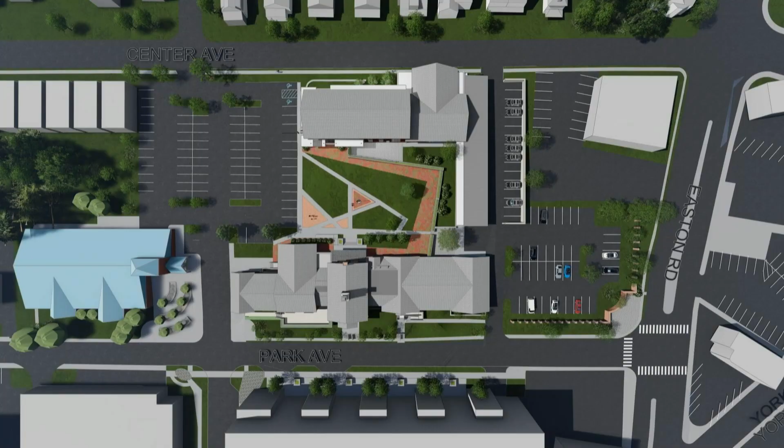All right. Good evening, everyone. Good to see you all again. Again, Rick Stamper with KCBA Architects. I believe you're all familiar with this plan. This is just an aerial view. We have the existing township building here, the library to the left, and then what will be the new police station here. We have an outdoor courtyard area, secure police parking area, the existing lot on the corner, and then the existing library lot, which had this row added for parking.

And I believe, Jim, that we maintain the current amount of parking. Is that correct? There's two less spaces on the property, but from a parking standpoint, in discussions with staff, we believe it's adequate. Okay, and since you saw this plan last, we did extend this sidewalk through to the rear so that somebody could come up through here if you wish. In light of that, we did add a little wall and a gate here to keep this area more secure.

And then you'll see down below here, we just boxed out the massing of the new project that'll be built across the street. So you will see that in some of our perspective shots, how it just kind of looms in the background. I'm going to go briefly through the building plans. They're oriented the same way that the buildings are in this plan.

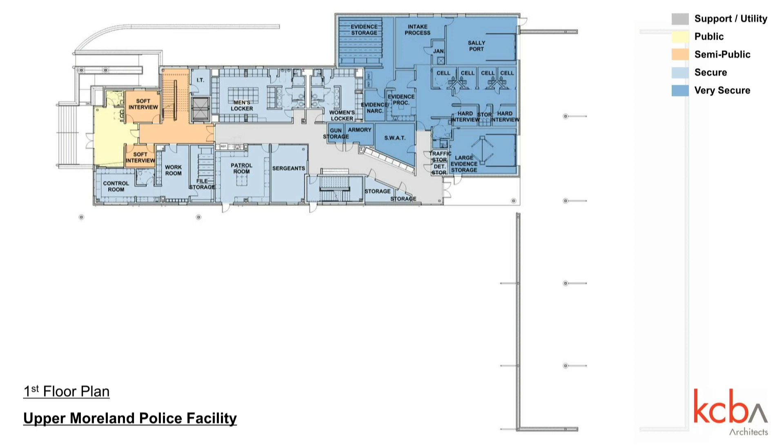And then anything in orange is what we're calling a semi-public space, which is a space where somebody would need to be invited back into or escorted through. This is the second level. We have the executive suite here. The semi-public comes up into this area too because we have the training room.

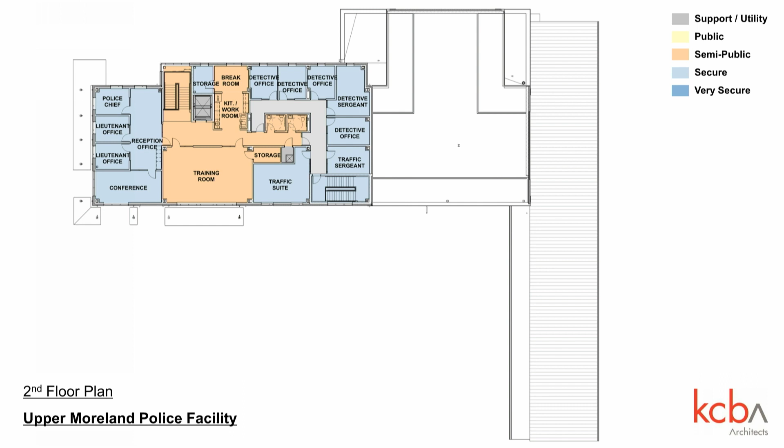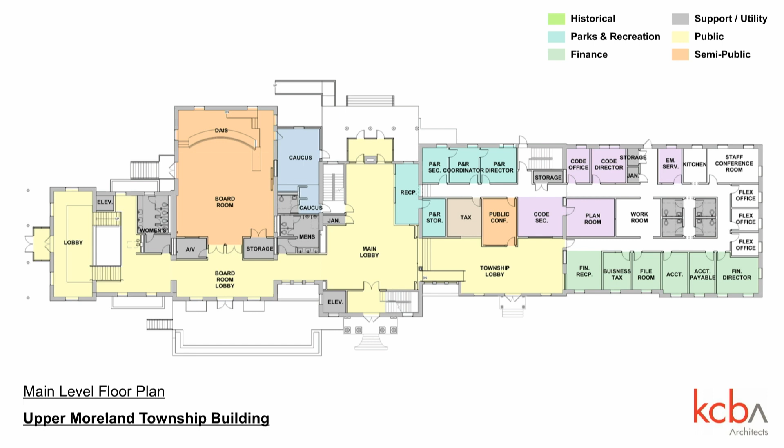Going down to the basement, you come down these stairs to a lower lobby, and we have the historical museum, some flex classroom spaces. And again, the public gets around to this elevator, so everybody on the main level can come down here and access this space, or from this entry, come down the lift and access that space. Beyond this door here, everything to the right is secure township spaces, and anything in gray is just staff areas. We did keep the offices to the nice window wells and windows. And then everything else is storage space for the offices above. And then carving out space for the EOC, along with some bathrooms and a kitchen.

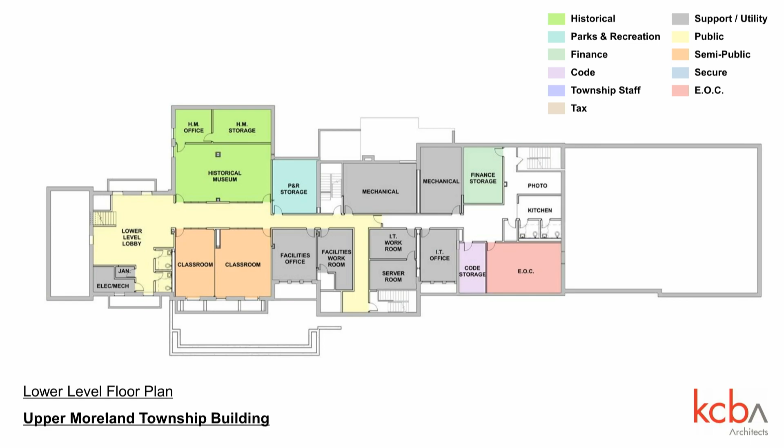What was the EOC? The Emergency Operations Center. Right now, it's in the police. Yep. It's an unfamiliar acronym to lots of people. Good, no, that's good to point out. Except when you have a hurricane.

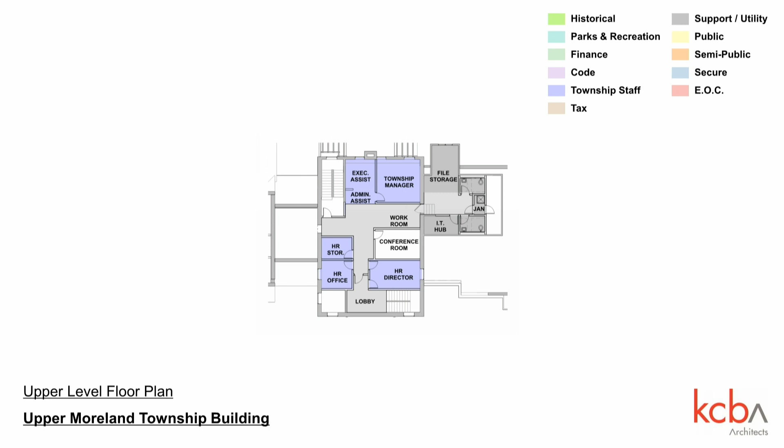Right. And then the upper story, it's basically who you have up there now, right, Matt? So it's the administrative suite for the township and the HR offices, a small conference room, some file storage and their bathrooms. So a bird's eye view from the new apartments across the street. Again, just to give you some orientation, the first perspective we're going to show you will be from Center Ave, from right about this point where you would enter the parking lot. So that's what that looks like there. Again, you can see the context of the houses over here, the township building, and then the new 6-story apartment buildings across the street.

So this is a view more from the neighborhood side of the street looking across. You'll see we have an ADA ramp that snakes up to get to the level of the entry there, and that houses the signage for the police there. And other than that, we'd have a set of steps up that is civic in some sense of the word, in terms of having a civic presence there. And then this is just showing more of the context with the library down here, and then what will be the lower entry, which will become a two-way in and out now.

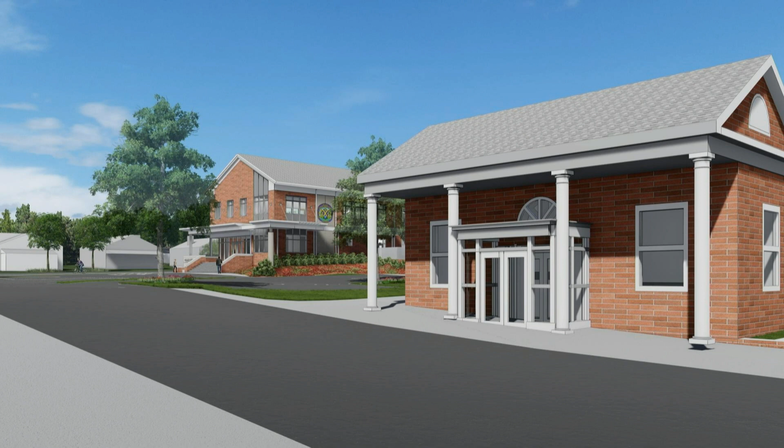The next shot is from that area looking back up into the site. Here you can see this is the existing portion of the township building where we have the vestibule added down here. And as we go up and turn the corner, you can get a sense of what that courtyard may look like.

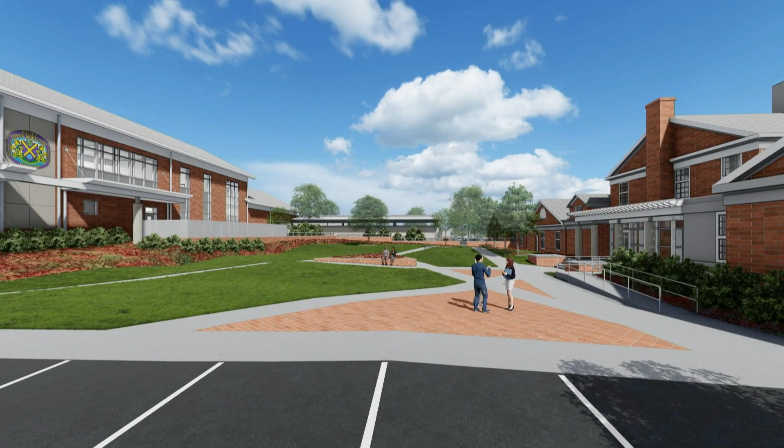And then moving up a bit so we can see the entry into the township building here, the caucus room addition here, and then a ramp up to get up to that level, flanked by some brick planters, frames the stairs. And then after I did this slide, I realized we probably want to do a nice low brick wall here to kind of define the edge of that ramp.

But other than that, we have this landscape wall that comes across the site. It does retain earth up top, which will help us a little bit with the cut and fill balance. And then behind that is the police kind of outdoor patio area. And you'll see beyond the secure parking of the police stretching beyond.

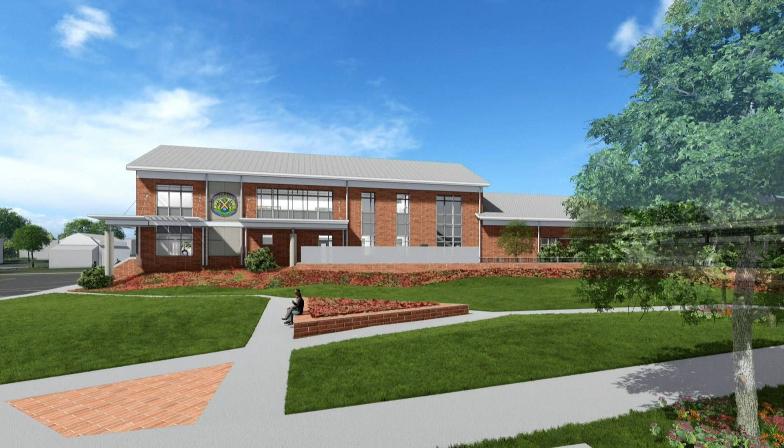And then this would be the view coming out of the entry from the township building, looking across the courtyard to the police building. And then this would be on the Easton Road end of Center Ave, looking down. Again, this would be the Sally Port area of the building, the secure parking for the police, and again, just in context of the neighborhood, what that'll look like.

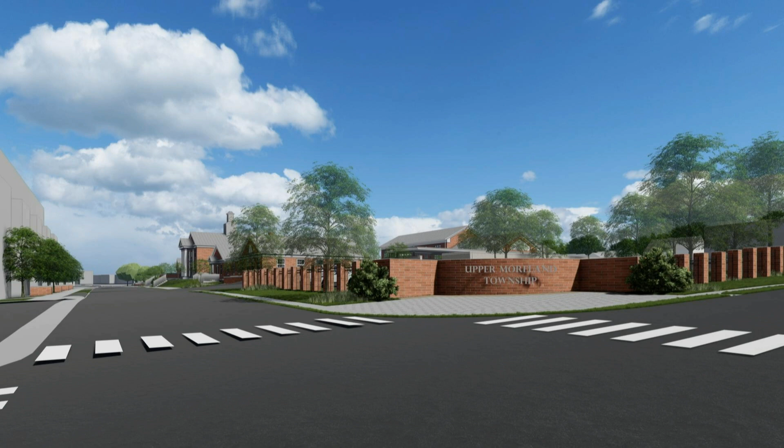And then this is for discussion purposes. This is at the corner of Easton and Park here. Kind of reshaping this corner, using some brick walls and some piers with some ornamental fencing in between to just shield the parking lot and kind of define this corner as kind of the entry into the township municipal complex. Again, you can kind of see the context of the 6-story building on the left side here.

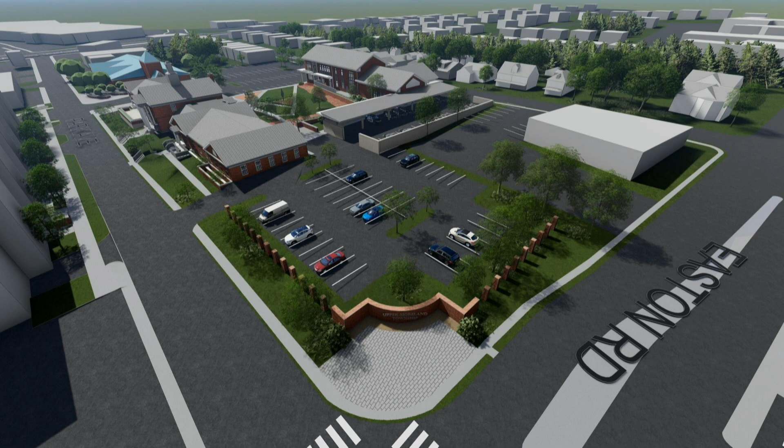But the concept here, looking down, we have the parking lot, so we want to give some thought as to how we treat that corner. Oops. And I don't think, Jim, you don't have that shown on your plan yet, right? It's on the landscape plans, but it's not on. Okay. All right, so I think that wraps it up for me, if there's any questions.

Yeah, a couple questions. Breaking ground to completion, timeframe. Completion of the police or the entire project? The police station, right. Cut a ribbon on the police station from when we break ground. Say we go out to bid in February, break ground late March, early April. I'd give it 12 to 16 months. I'm sure Jim will get into it. There's quite a bit of site work involved because of the detention systems required, which will take some time.

Any other questions for Rick? No, it's been the same since we started, except for this is a nice little entrance. To the public, we've been involved in this process and seen several different presentations like this, and the models have changed back and forth, and this is where we are right now. Yeah, I think, Rick, you made some really good modifications and additions.

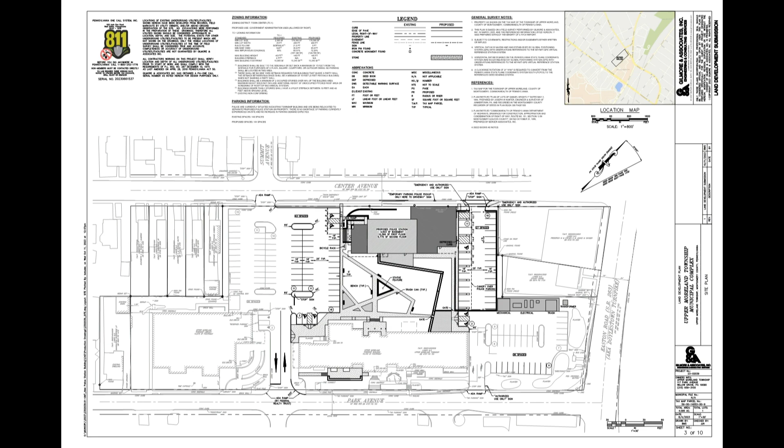We're also going to update the ADA ramps that don't actually exist here today on the sidewalks, so that'll have new ADA ramps along with new ones here, and then new ones for this entrance there. Other than that, from a site plan perspective, I think you could see it pretty well on Rick's plan. So we'll move on to the grading and drainage plan, so you can get a sense of what we're thinking about for stormwater management.

We did a lot of infiltration testing in the back area there. And what we found is that the groundwater and rock shouldn't be an issue, but the soils aren't conducive for infiltration. So what we end up doing is designing underground basins that are called managed release concepts. This is a DEP approved method, and it provides a lot of rate reduction. It provides water quality through filter mediums and amended soils, and then it mimics infiltration by metering water out as slowly as you possibly can.

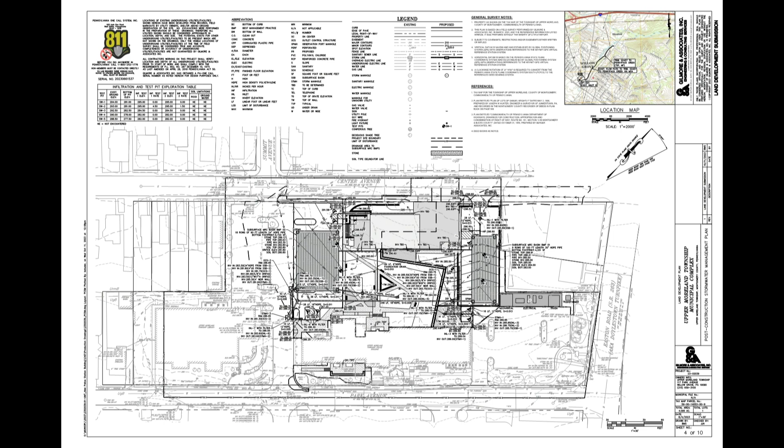So those are two subsurface infiltration or managed release concept basins that'll be located underneath the main parking area here, and then underneath the police dedicated parking area there. There are no waivers for stormwater management. You guys know how strict your ordinance is, and we designed it to that ordinance. And as you can see, they're very, very large in size.

Is it all handled in those two tanks? Or does the plaza in the middle or any of the other green spaces account for water? We put the basins underneath the parking areas, and we didn't use any of the green space for stormwater management. Okay, so then the point being that we will be doing better than our ordinance. You're meeting your ordinance.

But you didn't use all the green space in your calculations. Yeah, but, oh well, so in the impervious. What your ordinance requires is the pre-development model that we use to get the existing rates. We have to assume that the entire area being disturbed is meadow, even though a lot of it is impervious, because we're disturbing that parking that's there and putting back building. A lot of ordinances, you only have to account for the net increase in impervious, but you have a very strict ordinance, so we assume the whole site as meadow.

So, 100% meadow, right. Yeah, and in addition to that, there are currently no stormwater detention facilities on this entire site. So once the project is done, there'll be two very substantial facilities. Other than that, on grading and drainage, I don't really have much to add. I want to show you the landscaping plan, and then we can start to talk about the waivers, because a few of the waivers start with landscaping.

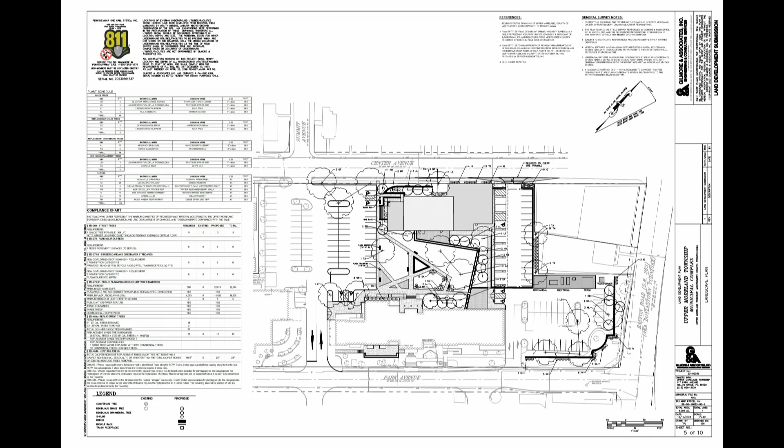But we have a lot of driveway there too. I was just thinking about from Summit all the way down, just to have one side of street parking. That could be discussed later too. Honestly, I think that Center is wide enough to have the on-street parking. You just want to limit it for whatever the visual obstruction, in and out of driveways, police operations are, yeah. Okay. Yeah, these are all very common sense and achievable requests for waivers.

Number 5? Number 5 was the street trees that we already talked about. Okay. Number 6 is for replacement trees. There are some very large mature trees that are adjacent to the parking area in the back here that have to come out to facilitate this plan. So what that does is it increases the amount of replacement trees that you're required to put in per the

ordinance. I think we did a decent job of trying to fit as many trees in these plaza areas here that we could, without creating a forest area there, which I don't believe was the intent of the plaza design. So basically what I'm saying is that I believe that we've put as many trees on this property as feasible to also achieve what you guys want to achieve.

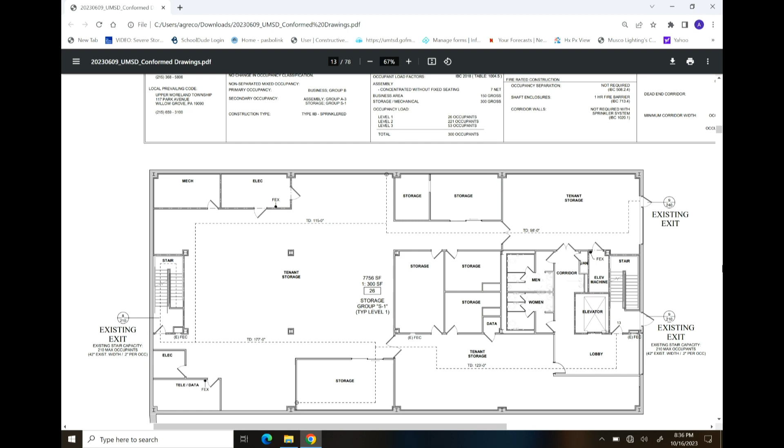So then the next one here will give you an idea of the work being done. Oop, a little too far. Oop, just did something. Okay, so these are the next two floors. I'll show you the second floor, which is the main floor, where our boardroom will be, as you can see in this picture.

This area right here, which is 1,644 square feet, is tenant space that can be rented. Same thing with this space here, along with this space here combined is 2,137 square feet. The only areas that we are doing work on right now on this floor would be the boardroom area and this area over here, which will be all of HR.

Then it will be a conference room here, small kitchenette, bathroom, and then we will have our front desk receptionist sitting here. And then these three rooms here are... Everything else after this is available space, but there's currently no work being done in any of those spaces until we have a tenant. That will also involve us paying permit fees and stuff when all that work is done, but until we have a tenant, we're not getting involved with any of that right now.

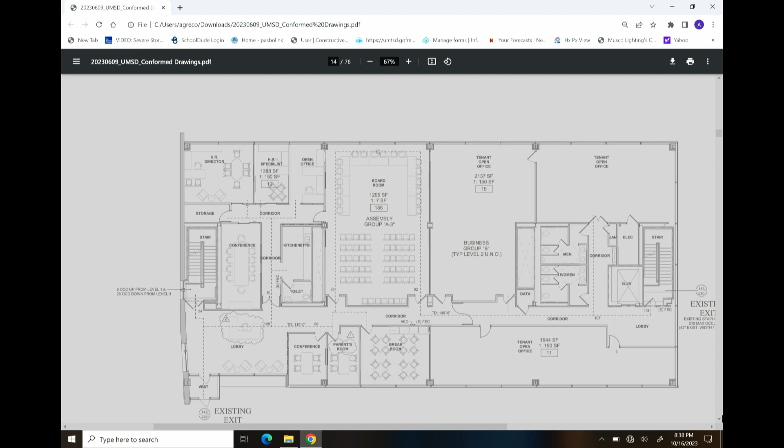The next floor here will show you the top floor, which is... Actually, excuse me Andrew, can you not show it, please? For security reasons, we shouldn't be showing the floor plan of our buildings. Okay, sure thing. I think it's totally fine to share this. Oh, you have to use your microphone, please. Yeah, could you just state your name, please? I'm sorry to interject like this.

My name is Jolie Price. I'm a school director in Upper Moreland, and for security purposes, we shouldn't be sharing the floor plans of district buildings publicly. While I think it's perfectly appropriate to share the document with you so that you can make decisions, it shouldn't be shared in a public manner. So, funny you should say that. One of the questions I have is about security and rental space. So you alluded to security and

planning. But the projection of, are there any students that are expected to visit this site for any reasons, education-wise? No. Not in the immediate future. So you understand why you have these onerous and required background checks and custody and all that stuff about walking into a school building. So my questions were, is there student involvement in this projected construction? Because we're talking about rental space for other businesses. And how,